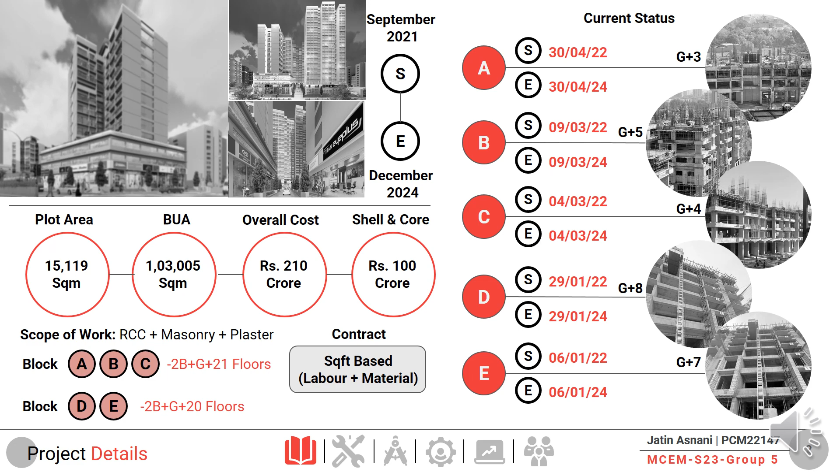Current status of the project suggests that block A is at the level of G plus 3, block B is at the level of G plus 5, block C is at the level of G plus 4, block D is at the level of G plus 8, and block E is G plus 7.

Coming to the pour planning. In pour planning, the slab cycle for our project was 17 days, in which only one pour was focused. The activities included in the slab cycle were line centering, reinforcement and shuttering work, leveling and checking of slabs, electrical conduits placing, and finally the concreting.

Here we can see that the formwork used at site was conventional, and speedy formwork for the shear wall of the lift. For the column formwork, we can see the image, in which various components are shown, like waller, anchor nuts, tie rod, plywood frame and bracing. And on the bottom side we can see the formwork for slab and beam, in which forehead, U-head jack, couplers, cup lock ledger, and vertical and base jack were provided.

For the pour planning, the scope of work included in the project was block A, in which the pours were divided into two parts, pour 1 and pour 2 of different areas, and the components for formwork like verticals, ledgers, base plate, forehead, etc. were calculated on the basis of the thumb rule which was followed at the site. The thumb rule was generally prepared after consulting the site personnel.

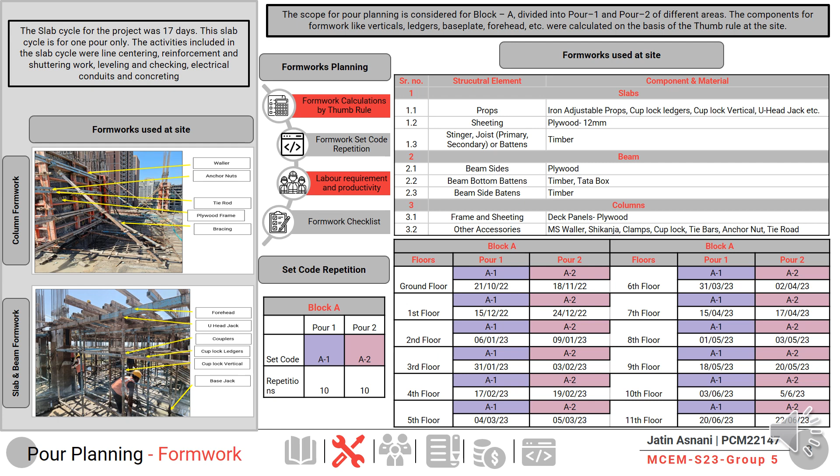In the formwork planning, we have done formwork calculations by thumb rule, formwork set code repetition, labor requirement and productivity, and finally the formwork checklist. Formwork used at site for slab, beam and columns can be shown with the different components and materials which were used for it, and the set code repetition was also carried out in block A, in pours A-1 and A-2, in which the total repetitions they were carrying out was 10 for each pour.

Next is the thumb rule calculations, and here we can see in the table the thumb rule considered for number of verticals, area into 4, and the total area, which was 584.7 square meters. Next is the base plate required, forehead required, ledgers required. Same for all the components, we have considered the thumb rule and calculated the total number of components required for each block. The total quantity of articles required after calculating was 3280 numbers, in which we have taken the pour area and the thumb rule which was assumed and considered at the site.

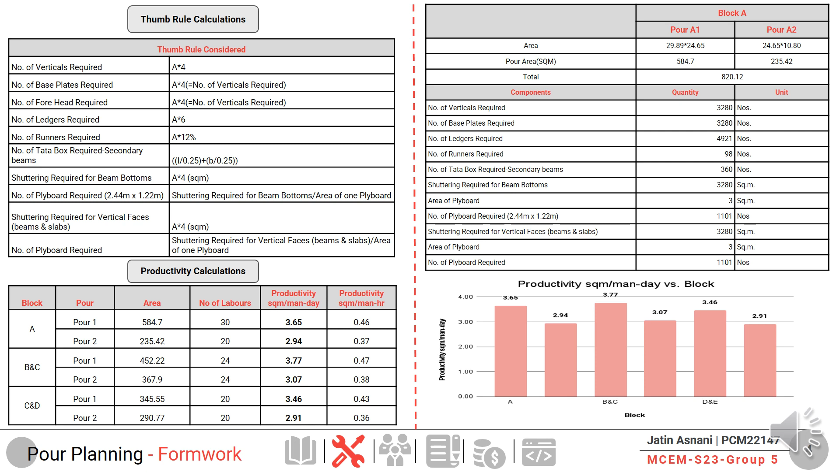After that, we have calculated the productivity for various blocks, in which the highest productivity was for blocks B and C, in which a total of 24 labors were deployed. Here in the table we can see that there are total 5 blocks, and 2 pours for each block, and the areas for each pour, number of labors, and from the number of labors and area, we finally calculated the productivity in square meter per day and square meter per man hour. And here we can see that the productivity is highest for blocks B and C, followed by block A and D, E.

Next is the linear responsibility chart. In the linear responsibility chart, we carried out the quality organization structure. After that structure, we found out the roles and responsibilities of each and every personnel involved in the quality control. After that, preparation of the linear responsibility chart was carried out. Here is the sample table which shows the linear responsibility chart.

On the left hand side we can see the legends, which show actual responsibility, general supervision, must be consulted, may be consulted and must be notified. And the various persons involved were client, contractor, architectural designer, structural designer, third party material testing agencies, etc.

And for that we have calculated almost 28 quality activities, and for this portfolio I have shown a sample of 5 activities, and the detailed activities are shown in the report. Here we can see that for the defined quality objectives, the client is actually responsible for preparing it, and the senior engineer from the client side is consulted for preparing the quality objectives.

Next, coming to the define material quality requirement, the client is actually responsible and he consults the senior engineer. After that, the contractor is generally supervised for the quality material selection, and the project manager is notified. The material selection of vendors for core and shell material is generally done by the contractor, in which the project manager is the actual responsible person, and the QA/QC manager is notified for the vendors who are selected, and the QA/QC assistant manager supervises the whole process.

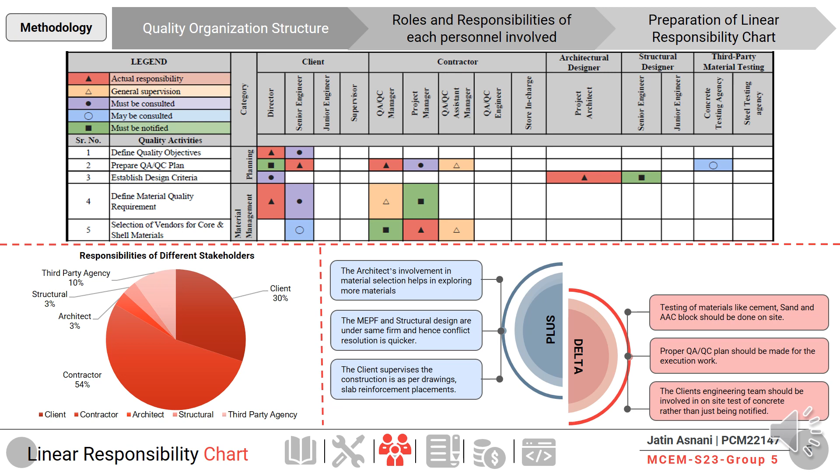Next, coming on to the quality laboratory, we have the hierarchy for quality lab personnel and the existing QC layout. We have also proposed the QC lab after consulting the site personnel, and we have also conducted various site visits for this assignment. So the hierarchy of quality lab personnel includes the QA/QC manager, who sits in the head office, and for the site we have a project manager, QA/QC assistant manager, and QA/QC engineer at site.

Here we can see some images of the curing tank. We have three curing tanks, one for the 7-day cube testing and two for the 28-day cube testing. The site also has a CTM machine. We have also prepared the existing QC layout in AutoCAD, in which the site has only the curing tank and a small QA/QC laboratory, in which only the CTM machine and cube molds are there.

After doing the assignment, we came to the conclusion and prepared a proposed QC layout, in which we provided the file rack and storage area for different equipments at site. We have also raised the platform to some height to keep the weighing balance and all equipments on the platform, and we also provided an opening for proper ventilation.

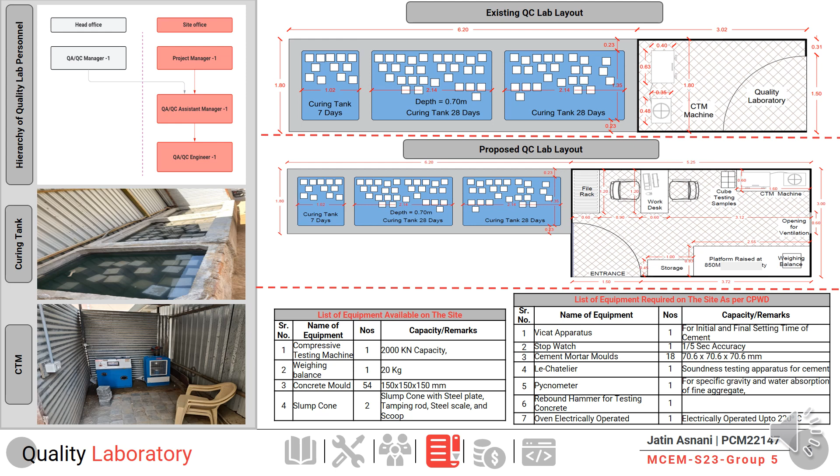Next topic is cost of quality. In cost of quality, generally there are two types: cost of conformance and cost of non-conformance, which is also called the deviation cost, and cost of conformance is called quality management cost. In quality management cost, we have prevention and appraisal cost, and in the deviation cost, we have the internal failure cost and the external failure cost.

For the procedure for non-conformance reported at site, first of all the NC is raised by the client's team, then the NCR is submitted to the assistant QA/QC engineer. After that, the method statement is submitted to the client engineering team, and the measure statement is also provided. After all the countermeasures and the methods for doing it properly, it is reviewed by the client engineering team, and finally the NCR is closed if the client is satisfied.

For the quality management cost, we have considered the cost of prevention and appraisal, with a total of 29 lakhs 40,000, in which the cost of prevention was 2 lakh 33,749 rupees and the cost of appraisal was 27 lakhs 6,000. The prevention cost includes the preparation of QA/QC requirements and checklists, establishing the QC laboratory, and the cost of equipment, and the total was 2,33,000.

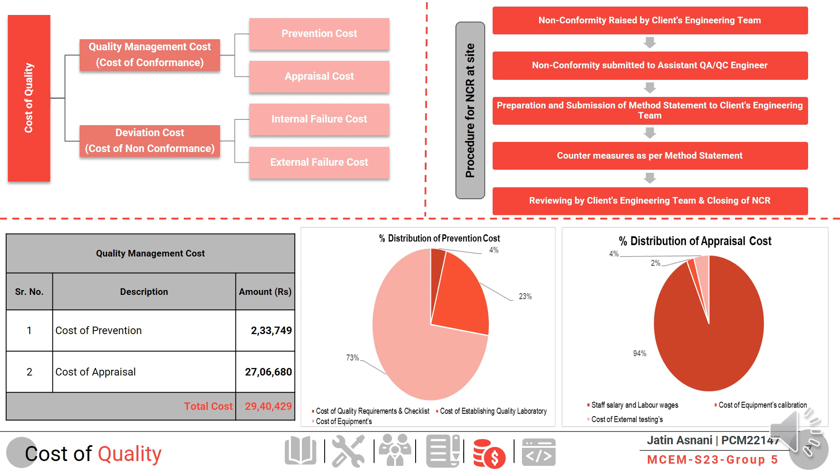during casting. For that, we have also calculated the cost of repairing it, in which we have considered material cost, labor cost, and inspection cost respectively. The total cost came out to be 1,440 rupees. And the second NC which we observed was also honeycombing in the beam of the 7th floor of block E.

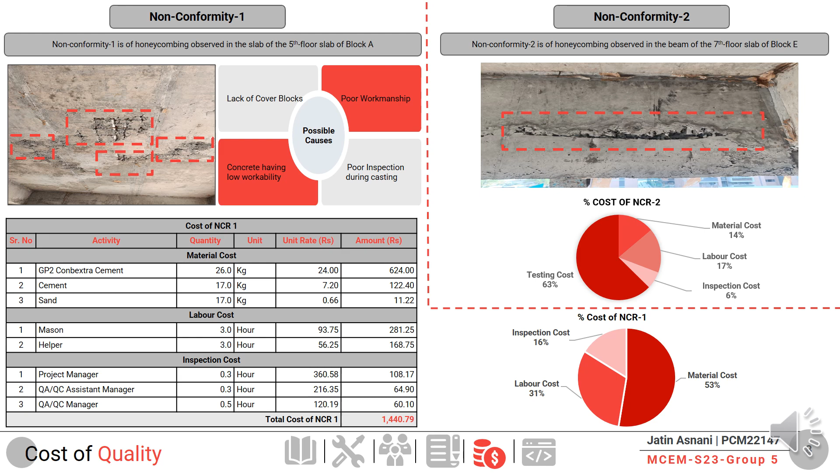Coming on to the next topic, which is project risk management. For the project risk management, the scope of work was analyzing the risk to the project for a total of two floors of tower A, which is the 5th floor and 6th floor. For this, the procedure of risk analysis includes importing the XER file which we have prepared for the project, in which we have done the Primavera planning also. Then after that, we prepared the risk register and imported it into the Primavera risk analysis.

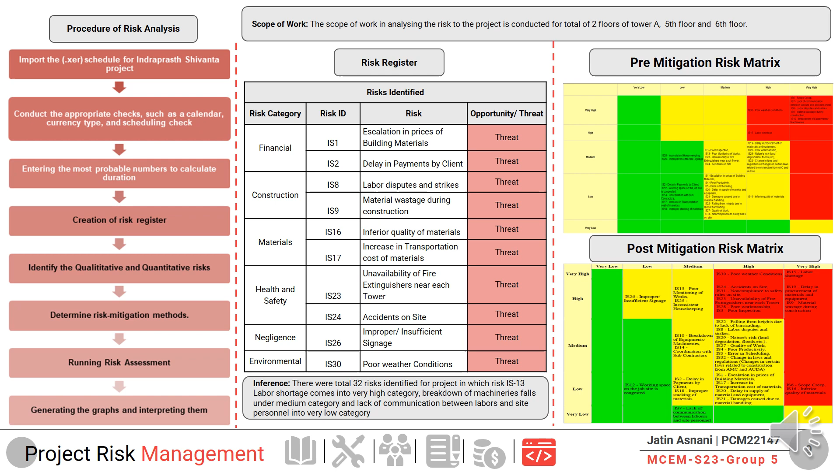After that, we have carried out the pre-mitigation risk matrix, and the post-mitigation risk matrix was generated in the Primavera risk analyzer. There were a total of 32 risks identified for the project, in which risk number 13 was labor shortage, which came out to be in the very high category. After doing the mitigating measures, the risk came out to be in the medium category.

After calculating the risk, we have also generated the different graphs, in which a distribution graph was prepared for finish date and duration, and a tornado graph was also generated for the duration sensitivity of the project. In the first graph, which is the distribution graph for finish date, the yellow arrow indicates the deterministic probability for achieving the project date is 13%, and the project can be completed on 28th April 2024. The project can also be completed on 27th May 2024 after calculating all the risks and all the delays incurred in the project.

And for the duration, the yellow arrow indicates the deterministic probability of completing the project in 388 days is 13%, and the project can be completed earliest in 373 days, and it can be delayed due to all contingencies and risks to 402 days. At last, we can see the comparison of planning techniques, in which CPM and PERT were considered, and the difference between both. We can see that the deterministic probability was 13% for duration, and for the finish date it was also 13%, and the finish date came out to be 12th May 2024.

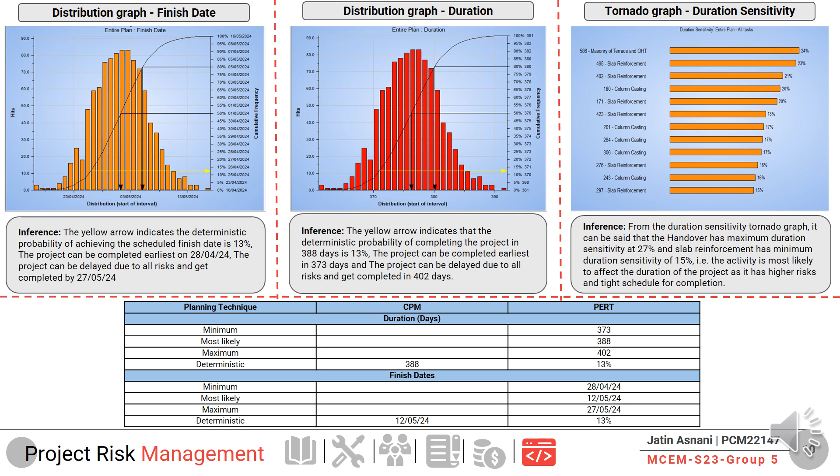For Primavera risk analysis, it allows the project manager to perform quantitative and qualitative risk analysis for the project. It also identifies the potential risks, estimates their likelihood and impact on the project outcomes, and develops contingency plans to mitigate them. As we have seen in the Primavera risk analysis, 32 risks were identified, and deterministic probability was also given for the duration and the finishing date of the project.

For the LRC, it gives the idea of various stakeholders involved and their roles and responsibilities. Multiple stakeholders were involved in the single activity of QC management, hence it also depicts the interdependency between all the stakeholders. The QC laboratory was examined on the site by conducting regular site visits. The roles and responsibilities of third party quality agencies and their role in quality management, documentation of different tests at the site, and the list of tests which are followed at the site. The persons involved were also identified, and their roles and responsibilities, as I have stated earlier.